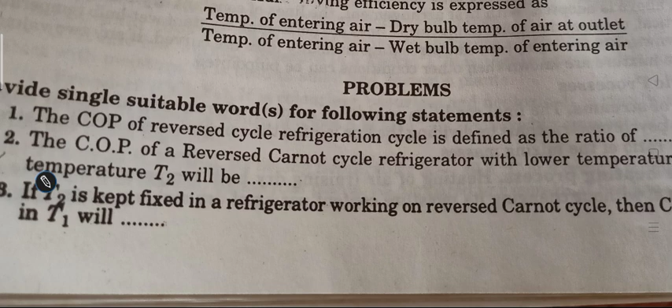Question 2: COP of reverse Carnot cycle with lower temperature T1 and higher temperature T2 will be. The right answer is T1 upon T2 minus T1.

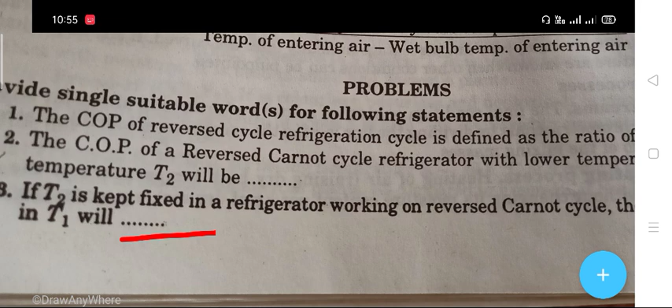Question 3: If T2 is kept fixed in a refrigerator working on reverse Carnot cycle, then COP with increase in T1 will be - increases.

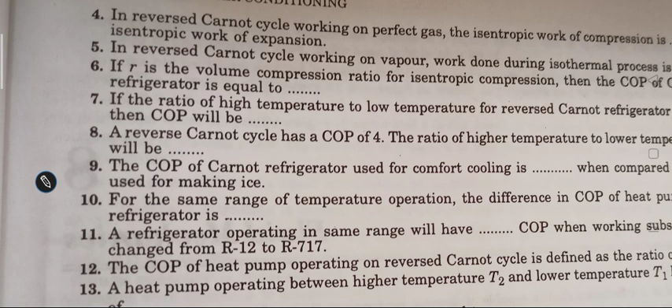Question 4: In a reverse Carnot cycle working on a perfect gas, the isentropic work of compression is dash isentropic work of expansion. The right answer is equal to - the isentropic work of compression is equal to the isentropic work of expansion.

Question 5: In reverse Carnot cycle working on a vapor, work done during isothermal process is. The right answer is 0.

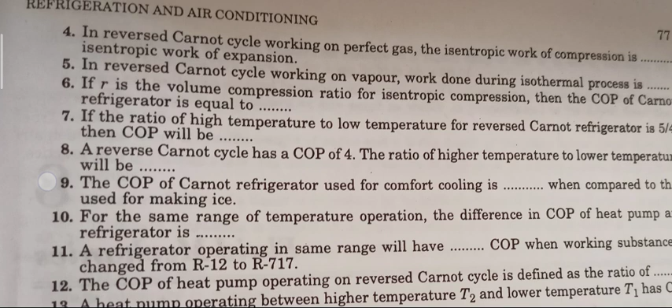Question 6: If R is the volume compression ratio for isentropic compression, then the COP of Carnot refrigerator is equal to. The right answer is 1 upon R to the power gamma minus 1.

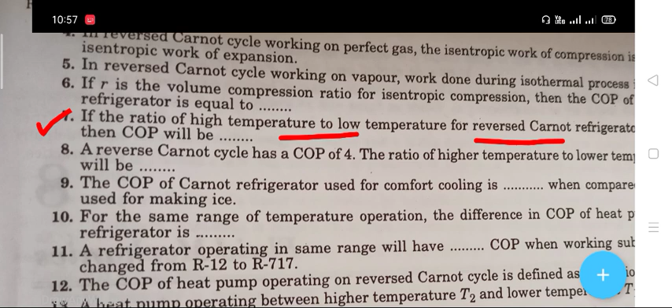Question 7: If the ratio of high temperature to low temperature for reverse Carnot refrigerator is 5/4, then COP will be. The right answer is 4.

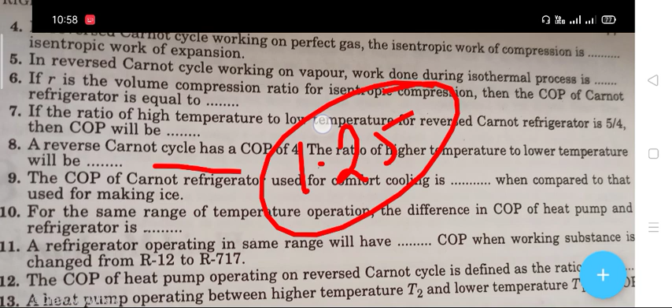Question 9: COP of Carnot refrigerator used for comfort cooling is dash when compared to that used for making ice. The right answer is higher.

Question 10: For the same range of temperature operation, the difference in COP of heat pump and refrigerator is. The right answer is unity.

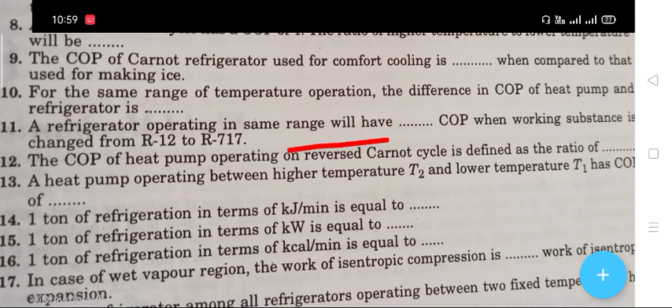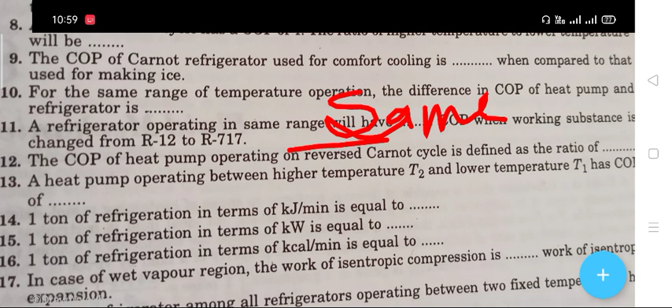Question 11: A refrigerator operating in the same range will have dash COP when working substance is changed from R12 to R717. The right answer is same COP.

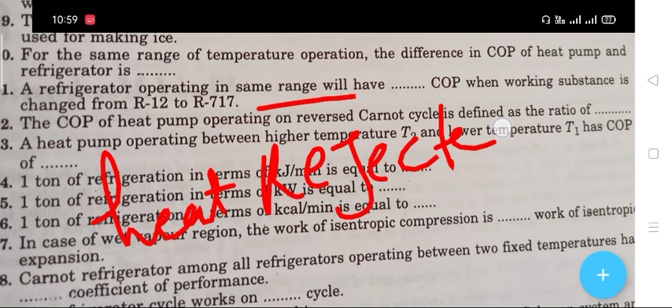Question 12: The COP of a heat pump operating on a reverse Carnot cycle is defined as a ratio of. The right answer is heat rejected and work done.

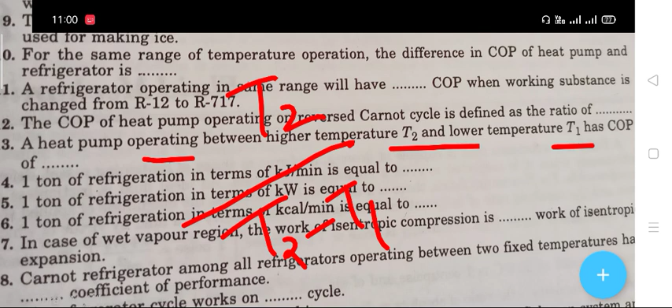Question 14: A ton of refrigeration in terms of kilojoule per minute is equal to. The right answer is 211.

Question 15: A ton of refrigeration in terms of kilowatt is equal to. The right answer is 3.52.

Question 16: A ton of refrigeration in terms of kilocalorie per minute is equal to. The right answer is 50.4.

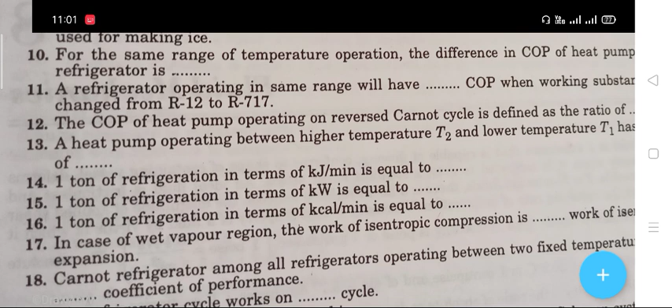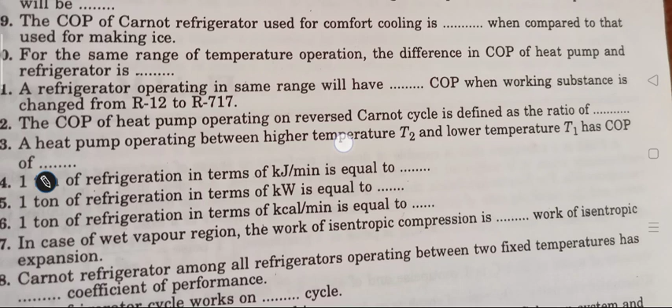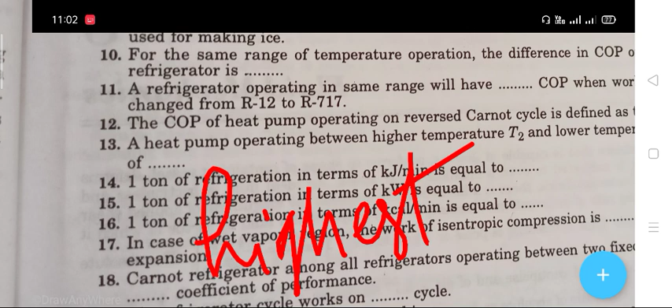Question 18: Carnot refrigerator, among all the refrigerators operating between two fixed temperatures, has dash coefficient of performance. The right answer is highest coefficient of performance.

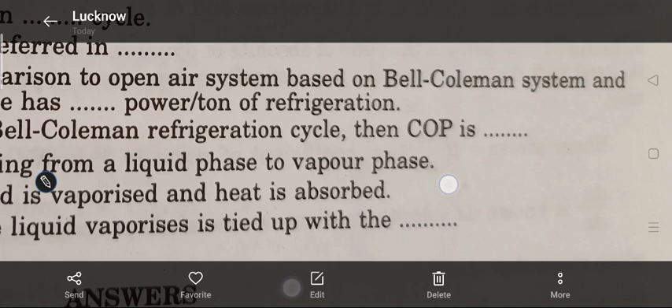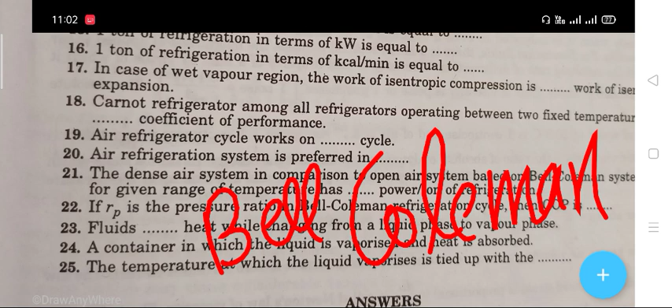Question 19: Air refrigerator cycle works on dash cycle. The right answer is Bell-Coleman cycle.

Question 20: Air refrigeration system is preferred in dash. The right answer is aircraft.

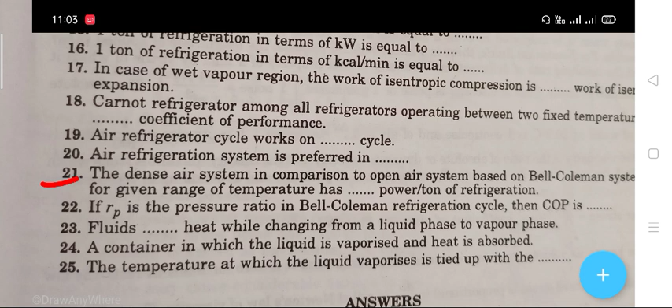Question 21: The dense air system in comparison to open air system based on Bell-Coleman system for a given range of temperature has dash power per ton of refrigeration. The right answer is lower power per ton of refrigeration.

Question 22: If Rp is the pressure ratio in Bell-Coleman refrigeration cycle, then COP is. The right answer is 1 upon Rp to the power gamma minus 1 upon gamma, minus 1.

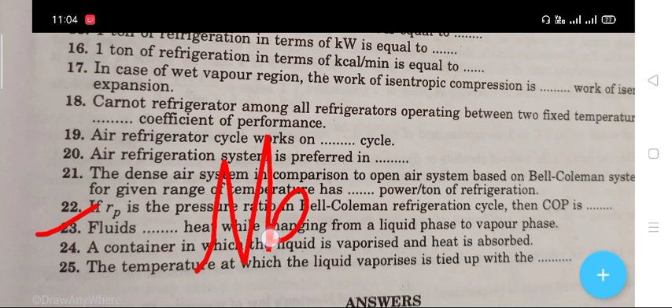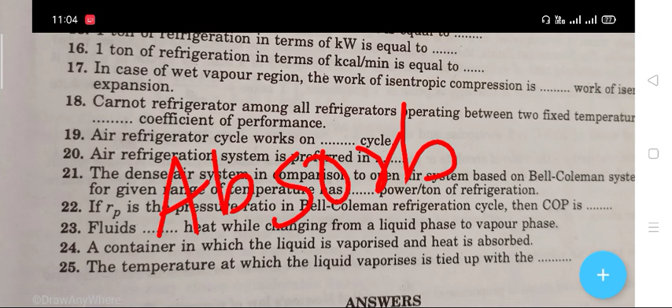Question 23: Fluids dash heat while changing from liquid phase to vapor phase. The right answer is absorb - fluids absorb heat while changing from liquid phase to vapor phase.

Question 24: A container in which the liquid is vaporized and heat is absorbed. The right answer is the evaporator.

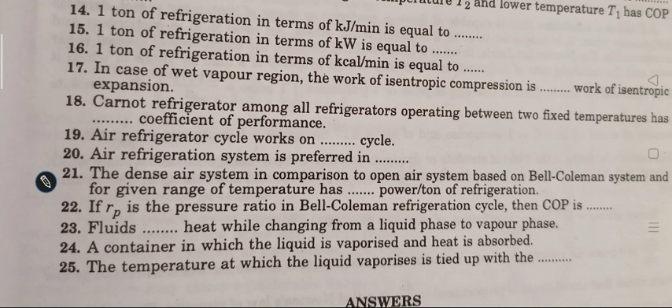Question 25: The temperature at which the liquid is vaporized is tied with the right answer, which is pressure.